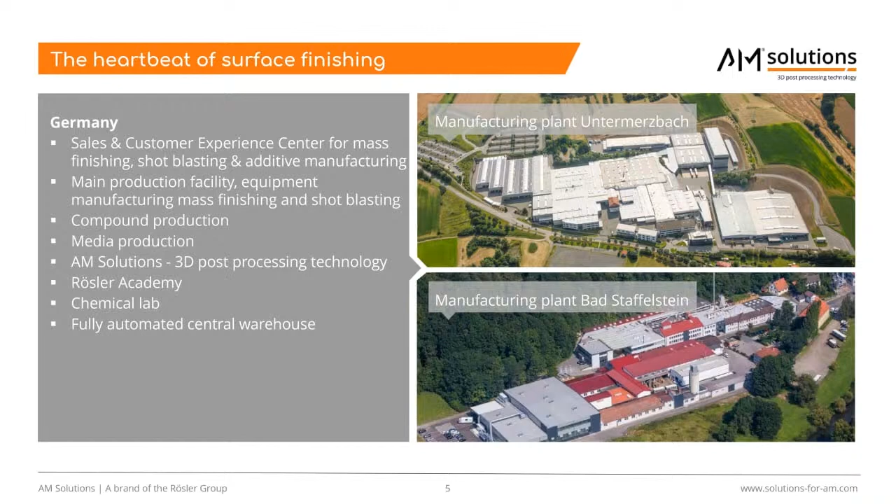So what you saw on the video are the three pillars of the Rösler Group: mass finishing, shot blasting, and AM Solutions. What you can see here on the slides is our headquarters in Germany, one in Untermerzbach, one in Bad Staffelstein. Both are in the north of Bavaria, in the region called Franconia.

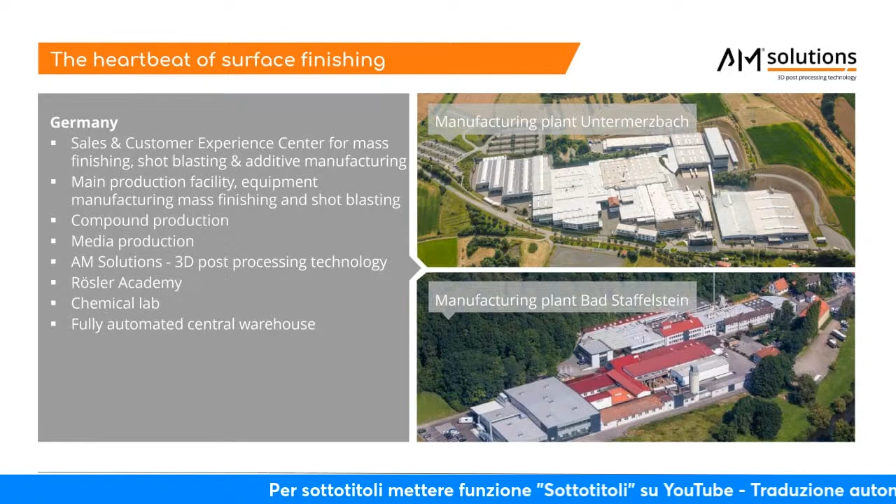In these facilities, we really build up our machines from a steel plate to the finished machine, including all the engineering - software engineering, mechanical engineering, electrical engineering, manufacturing, welding, and so on, including the electrical cabinet. We also have media production and mass finishing there. And of course, we have the Rösler Academy, the AM Solutions, and a chemical lab, and so on.

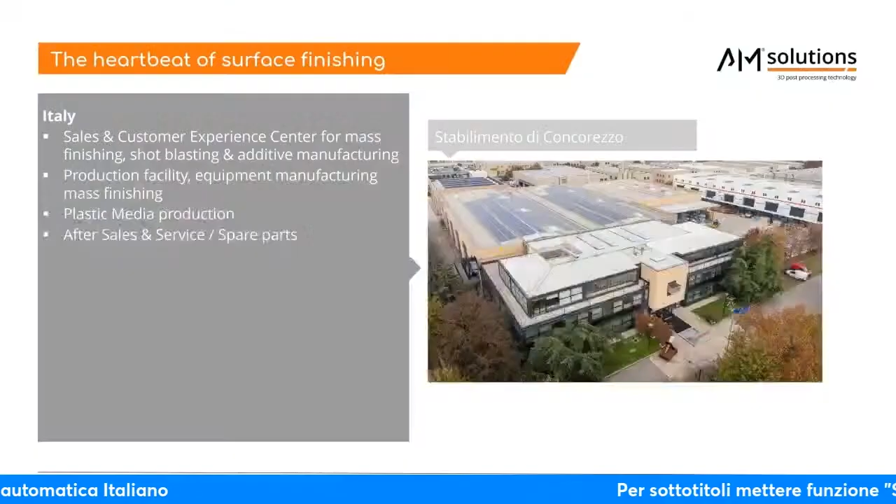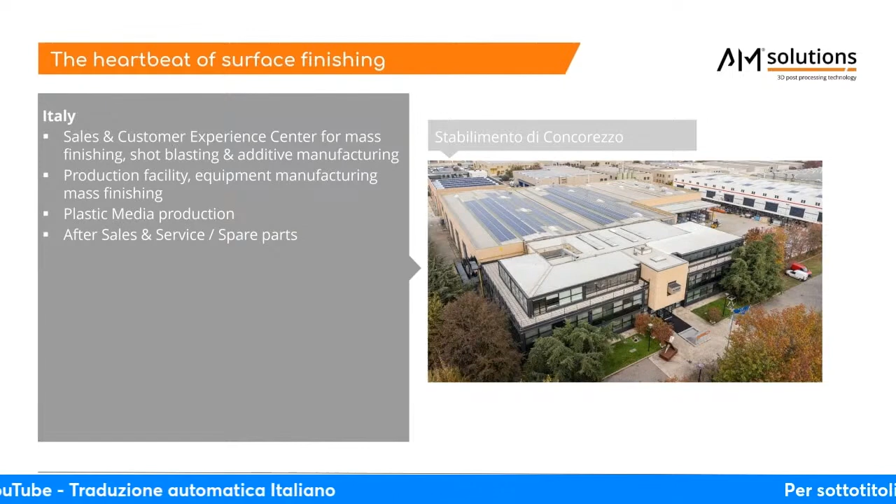I would like also to introduce to you our headquarters in Italy, in Concorezzo, close to Monza. Also with a sales team and a customer experience center for our customers. Production, service, and plastic media production are located there as well.

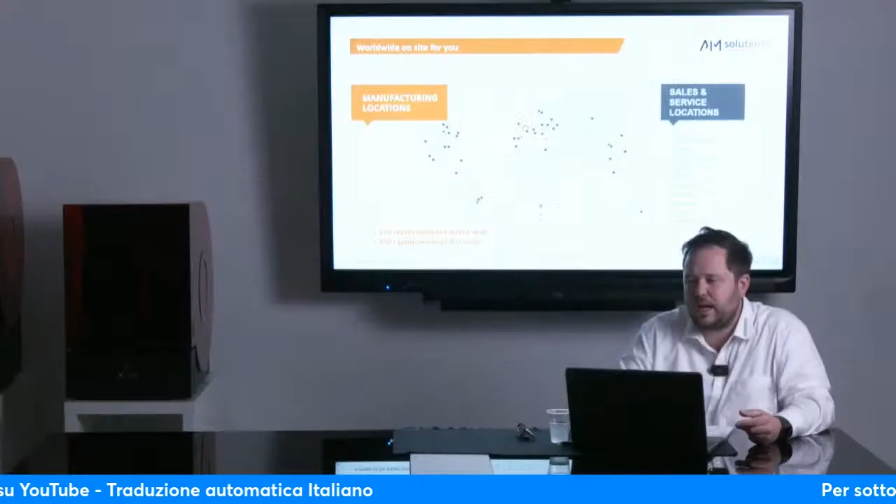And we are a global player. That means we can really service your machines and your processes across the world with our manufacturing locations, for example in Germany, France, Italy, and the US, but also several additional Rösler locations for sales and services, and 150 representatives worldwide.

Some facts and figures of the Rösler Group: we are close to 1,600 employees. We have more than 80 years experience in surface finishing. And, for example, we produce more than 50,000 different process media for mass finishing.

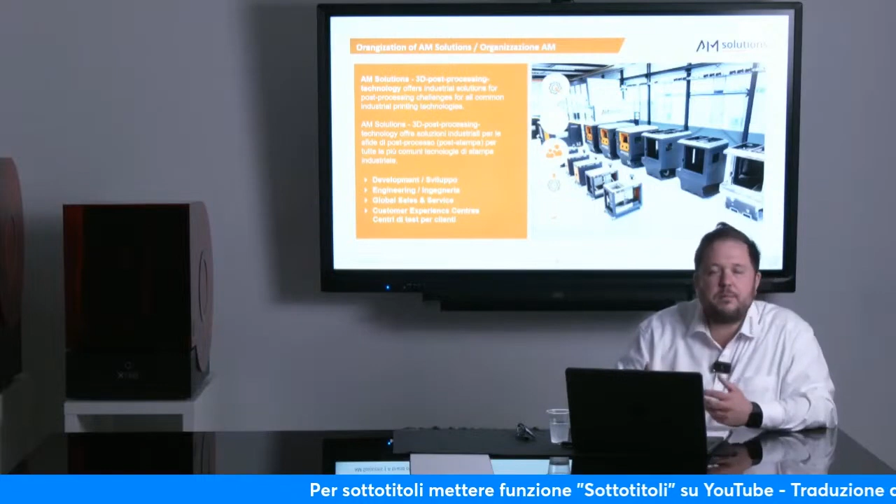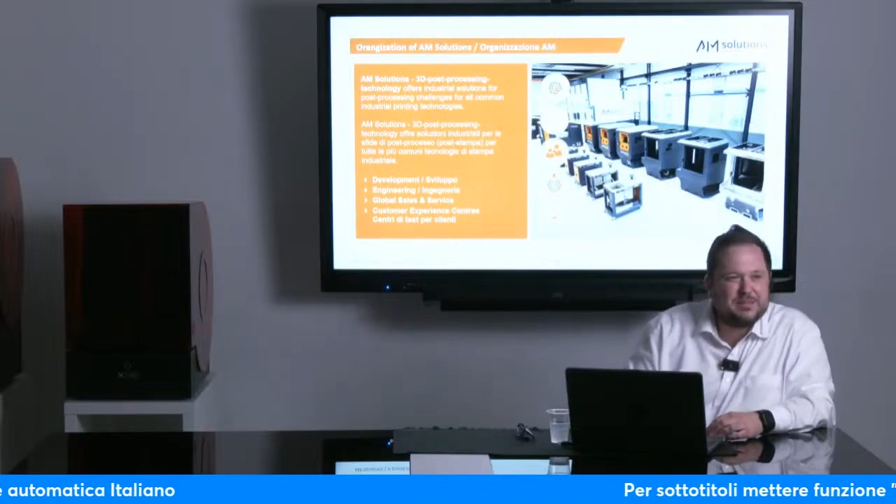Here's a short idea of the organization of AM Solutions. AM Solutions was founded in 2018 as a brand of the Rösler Group. Why? Because we figured out a lot of requests from this crazy 3D printing world, and we needed to found a small team which we give the space and also empower to act in this environment of 3D printing. That is why we have a team of developers, a team of engineers, and of course a global sales team to have really the right solutions for our customers.

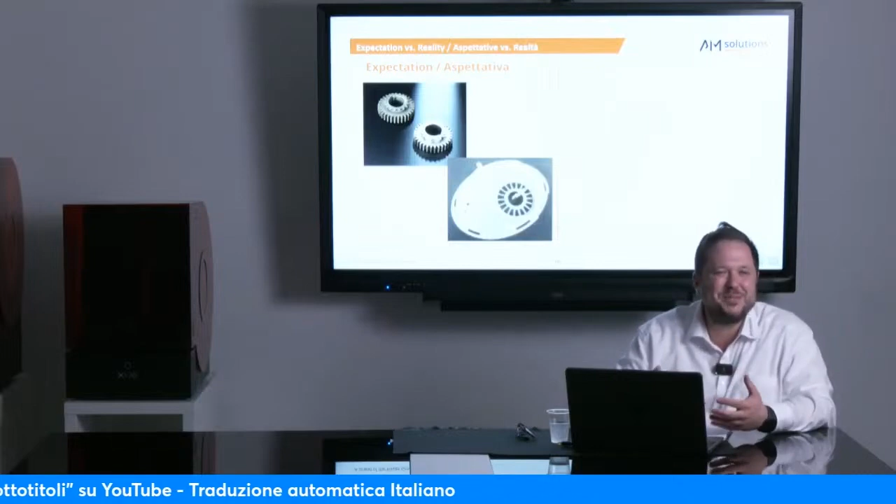But why AM Solutions? When we started in 2018, we also believed in miracles - we thought, okay, you have a 3D file, push the button on print like on a desktop printer, and you receive the finished part. But the reality was different.

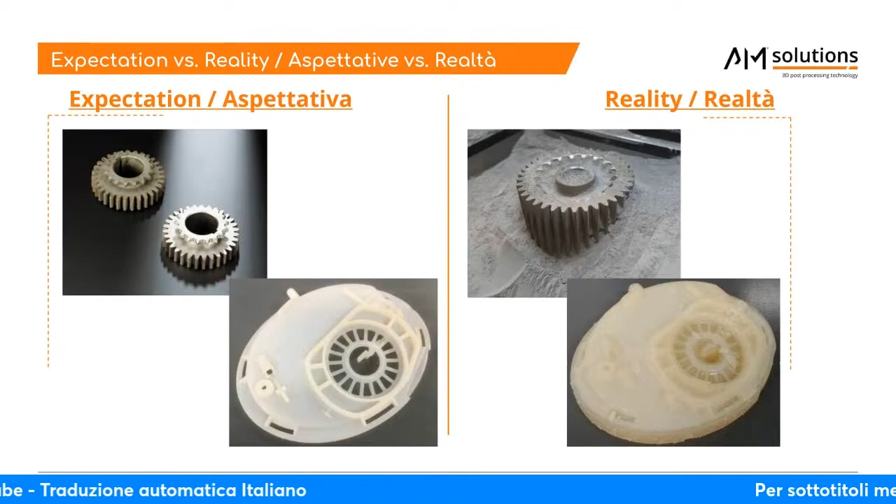And so alongside that, we also saw in the Wohlers report of 2019 that a quarter of the overall costs per piece are dedicated to post-processing. Well, meanwhile, I think it's a third of the costs.

Our philosophy, our vision, is to have an automatic solution. It could be with a robot, but could be also smart engineered machines.

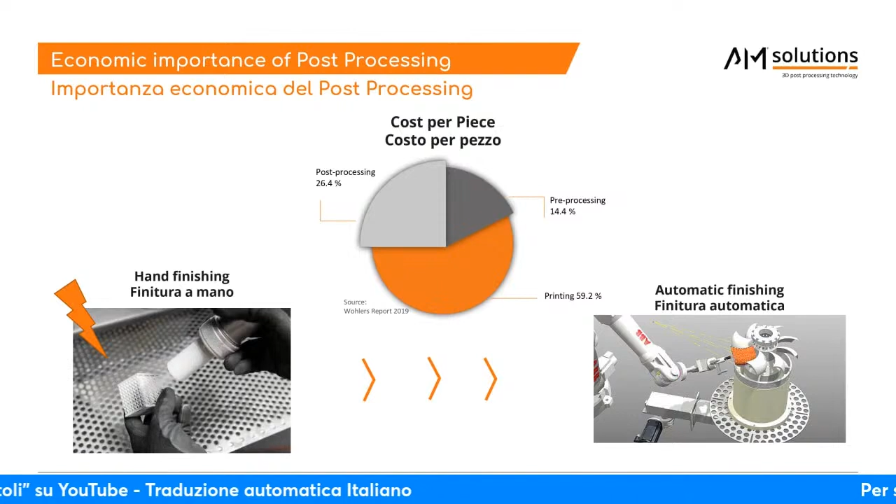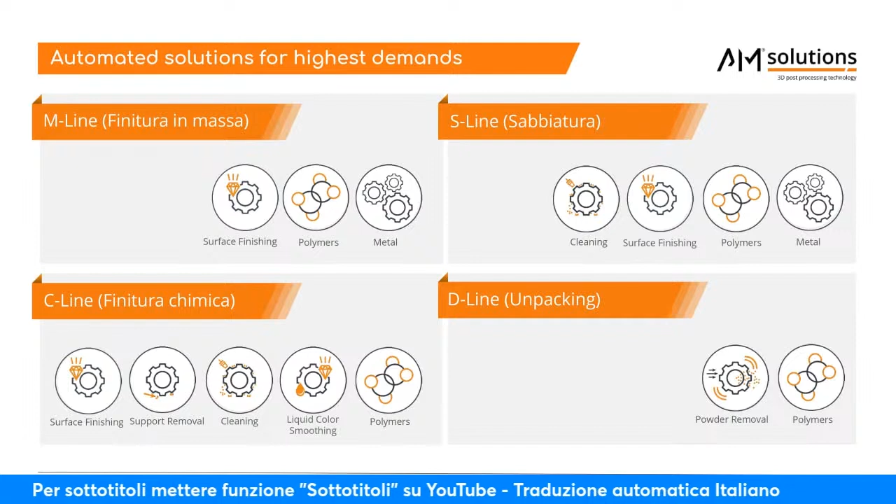We have, alongside all necessary industrial printing solutions, post-processing solutions available. We have mainly 4 different types: the M line for mass finishing, the S line for shot blasting, the C line for chemical, and the D line for unpacking.

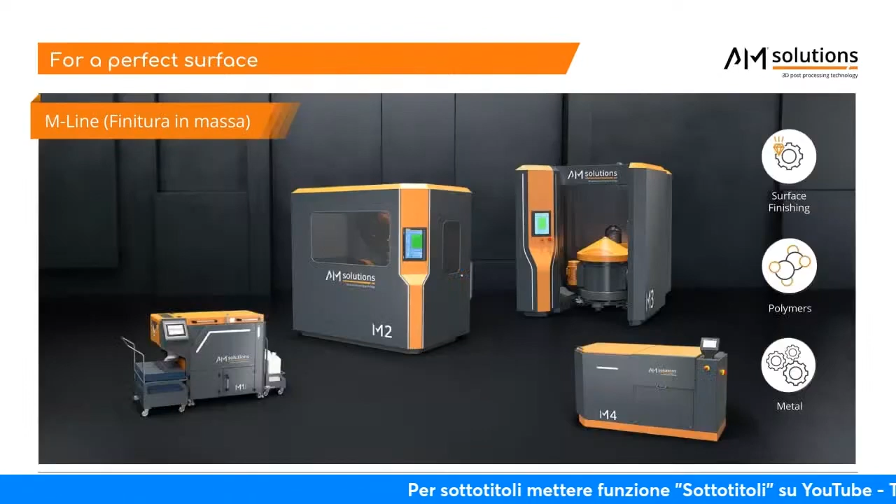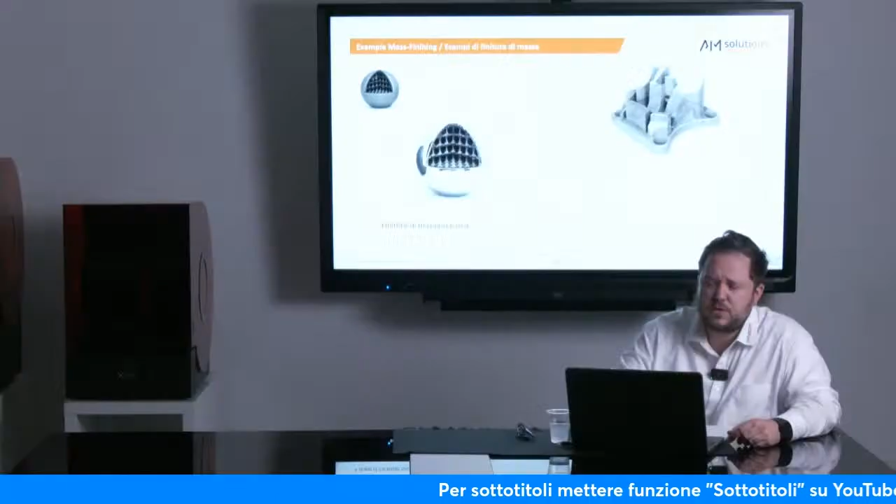To give you a brief overview of the M line, here are some examples of our machines. But more interesting is the parts we can work on. For SLM parts, which are usually quite rough, the RA value starts at 9, goes up to 14, 15, even more. We can reduce the roughness with mass finishing down to an RA value less than 0.something, for example for medical implants. What's also super interesting is that we are able to treat inner channels too. This is a development mainly made in Italy by our colleagues in Concorezzo.

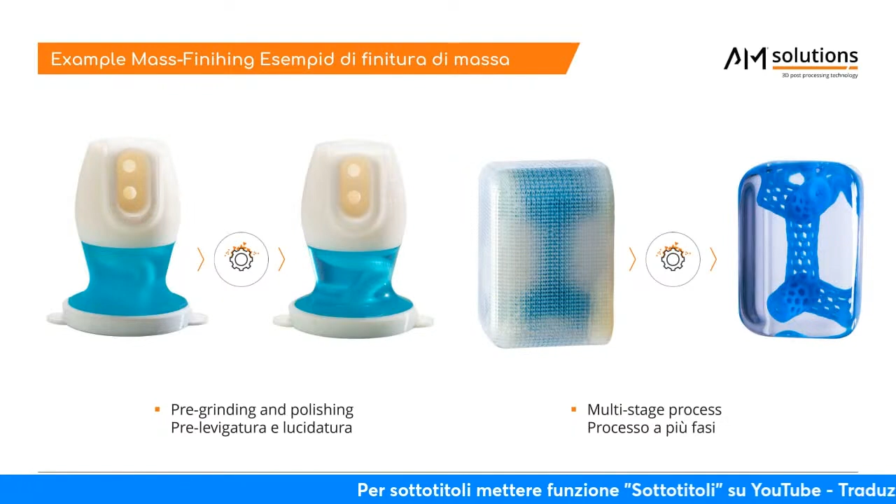We are also able in mass finishing to treat SLA parts, like the world's first USB stethoscope you can see here, which is 3D printed. It's one of our customers. We make a pre-grinding and a polishing, and we also have the part with us in the exhibition outside. That means we can make polyjet parts really glass clear.

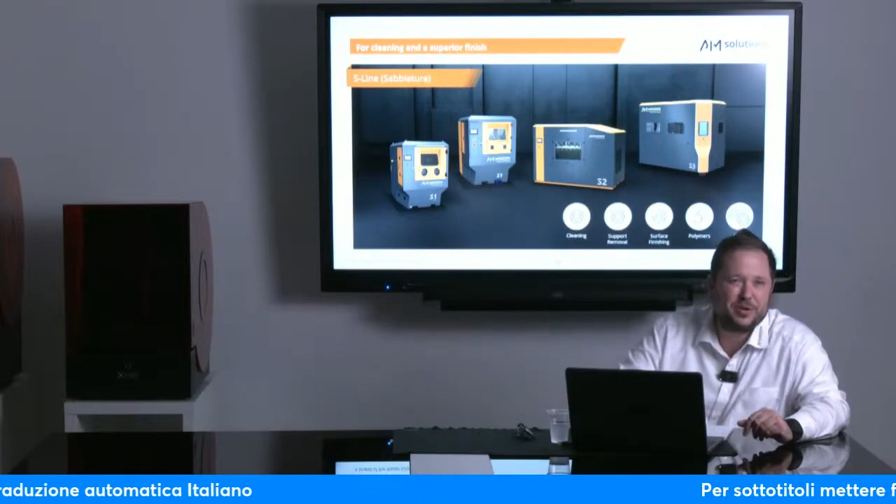Short overview about the S line. Feel free to ask us. Treddy is one of our lovely partners, with the S2 and the S1. I'll give you one example for shot blasting: wet sanding, meaning wet blasting, which is also super interesting for metal parts. You can have an abrasive wet blasting process as step 1, and on top of that you can add an additional second polishing step.

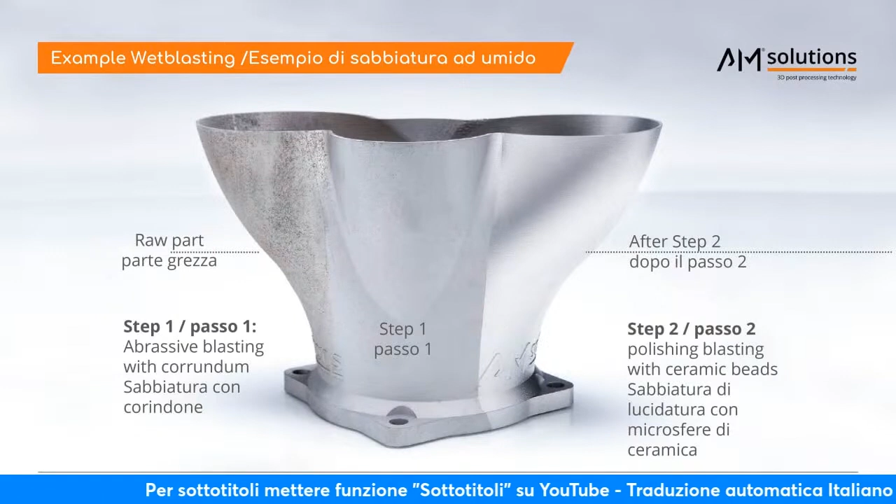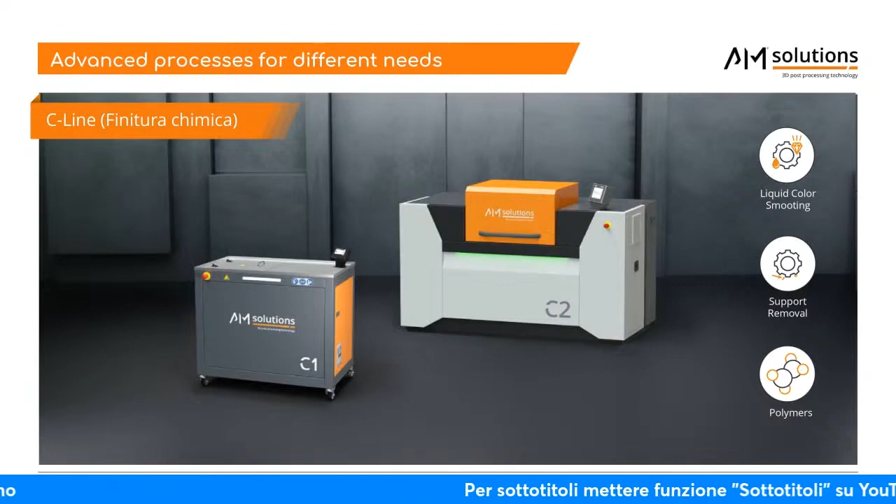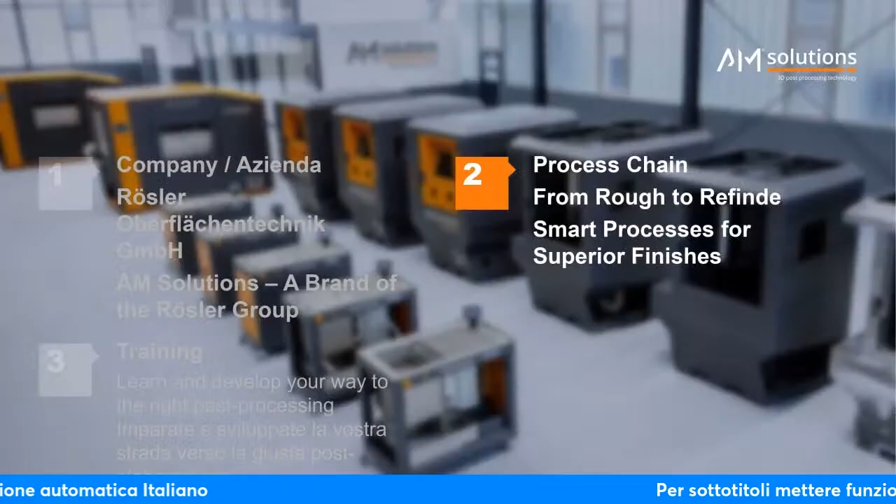Now let's come to the core: the smart processes for superior finish. I'll pick an example from the usual process chain, and we will shape today the process chain the way we do it with our 2-in-1 approach. I'll give you some examples of why your blasting media is so important to shape your surface.

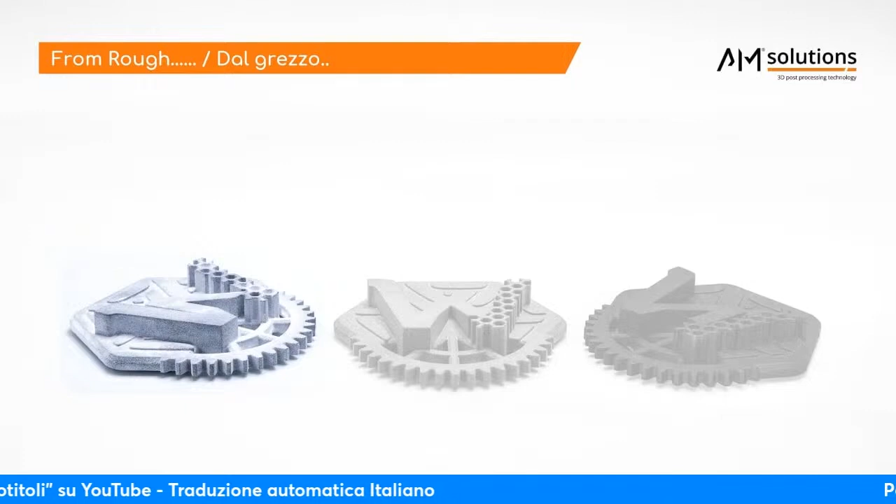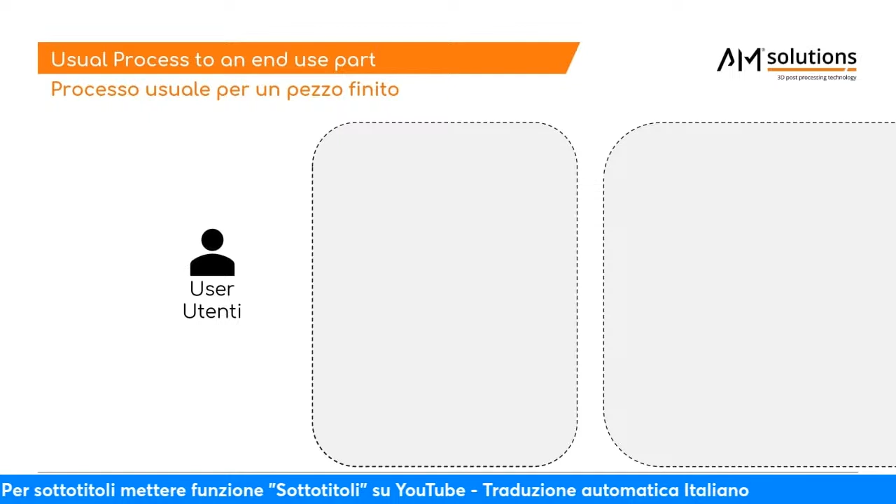For example, from rough - you know MJF parts, after unpacking you have the potato state - to a clean part, which then often gets colored by dyeing, and you would like to have a dyed part. So now you're the user thinking, okay, what are my post-processing steps?

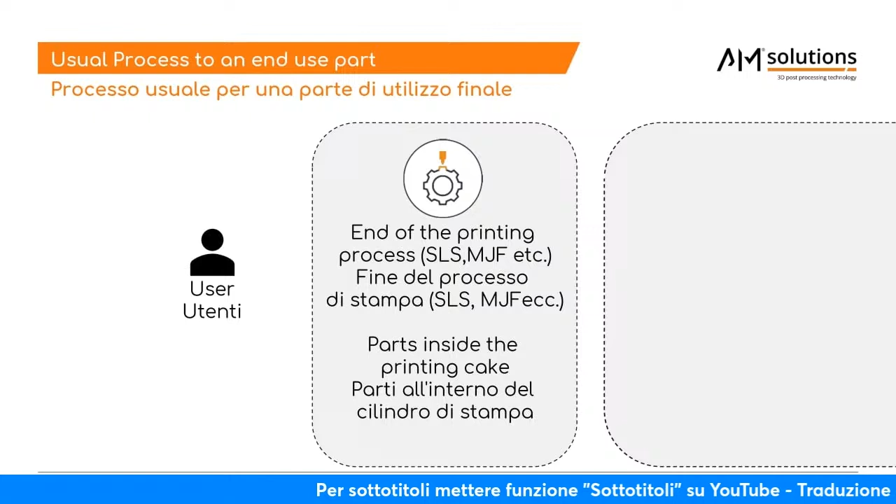First of all, we start post-processing in our philosophy at the end of printing. That means you have the full cake with parts and loose powder. So the first step is unpacking, of course. Unpacking is often a manual-driven process - you dig the parts out of the powder cake. That's why, for example, AM Solutions and HP together made a joint development in an automatic unpacking station, which is available at HP.

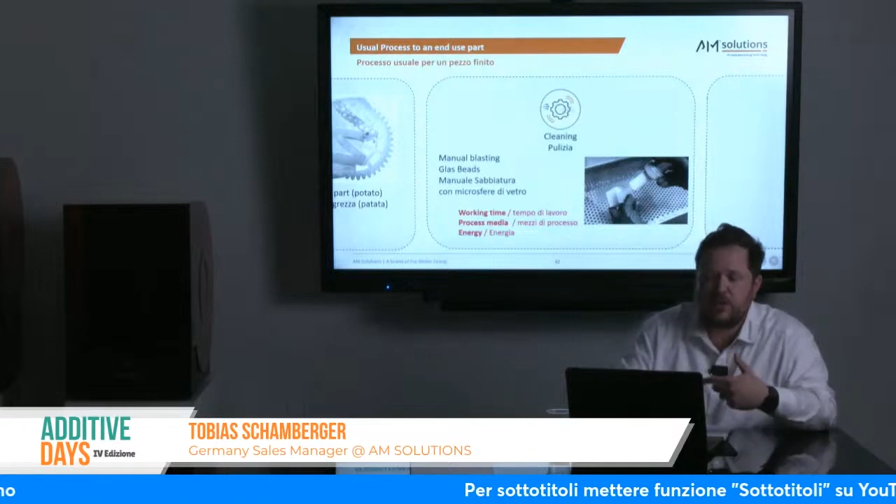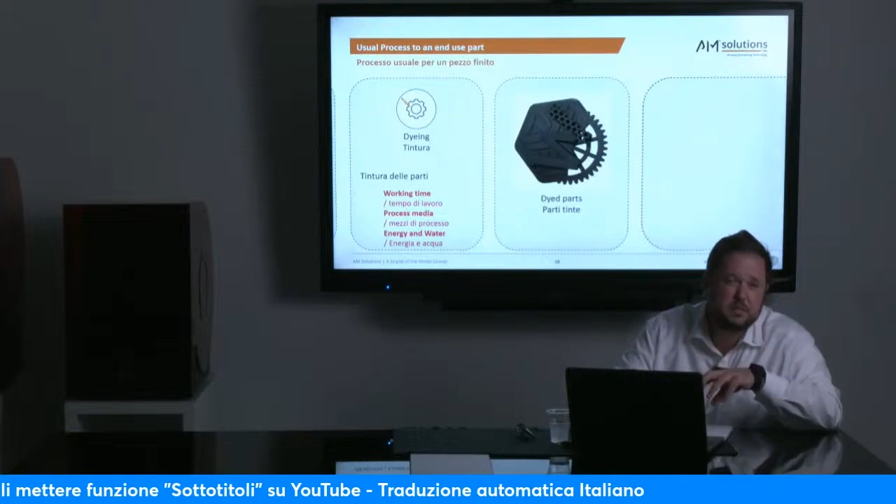Then, of course, you have the raw parts, the potato stage. From the potato stage, you want to receive a dyed part, so you have a cleaning process usually done with a glass bead. Then you have the clean parts, and afterwards you do the dyeing. Everything involves working time, process media, energy, water, as well for the dyeing, and then you have the dyed parts. But in this process, you don't have the final appearance of a dyed part because it's not semi-glossy when you dye it directly after glass bead finishing.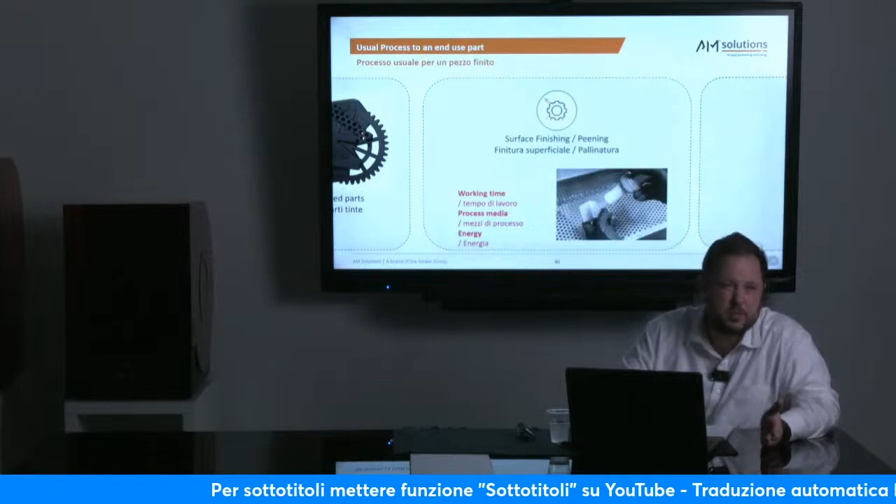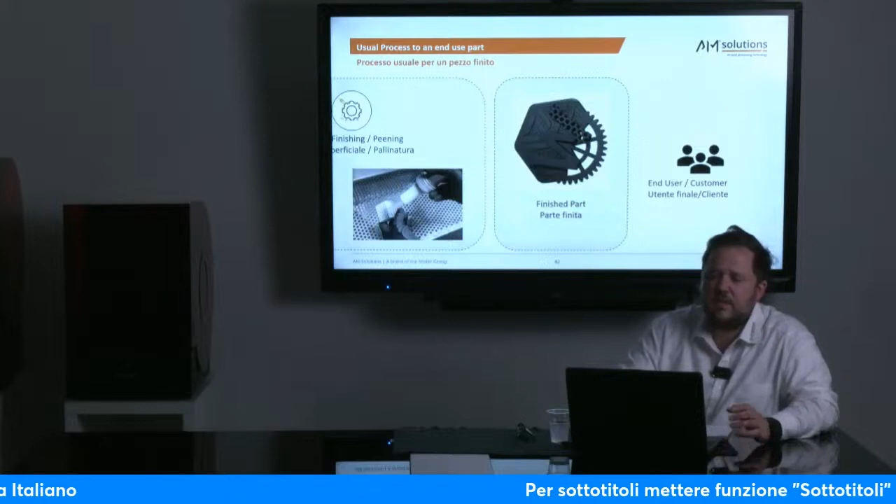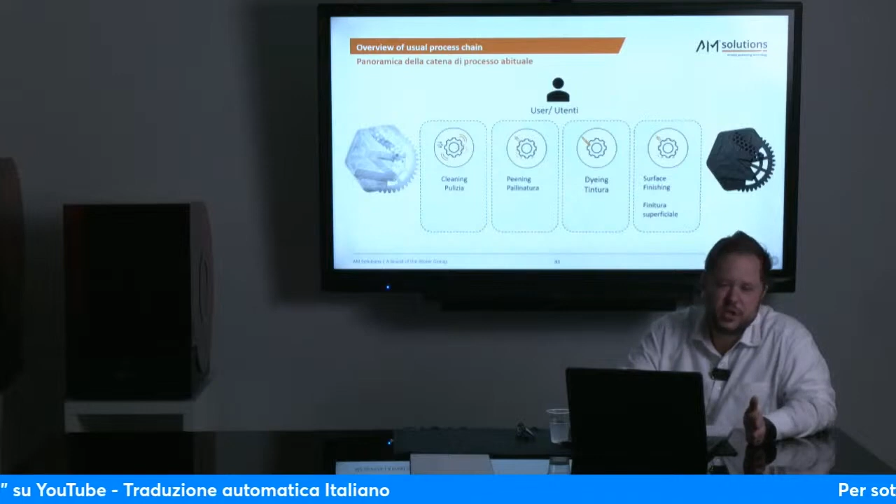So that means you need to add an additional shot peening process on the already dyed parts to receive a more semi-glossy surface. Once again: working time, energy consumption, and process media. And then finally you receive your finished part - what was the expectation, not of the user, but of the customer, of course. So quite a long process chain with a lot of steps.

The usual step is also, for some parts, cleaning with a glass bead, shot peening with a polymer blasting media, then going to dyeing, and for some parts you have post-shot peening after the dyeing - for example luxury stuff like glasses, which usually need to be blasted after the dyeing process.

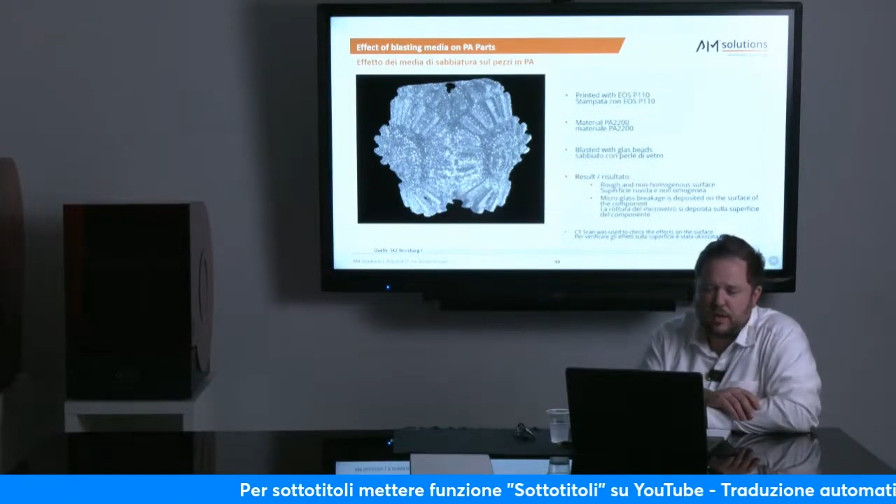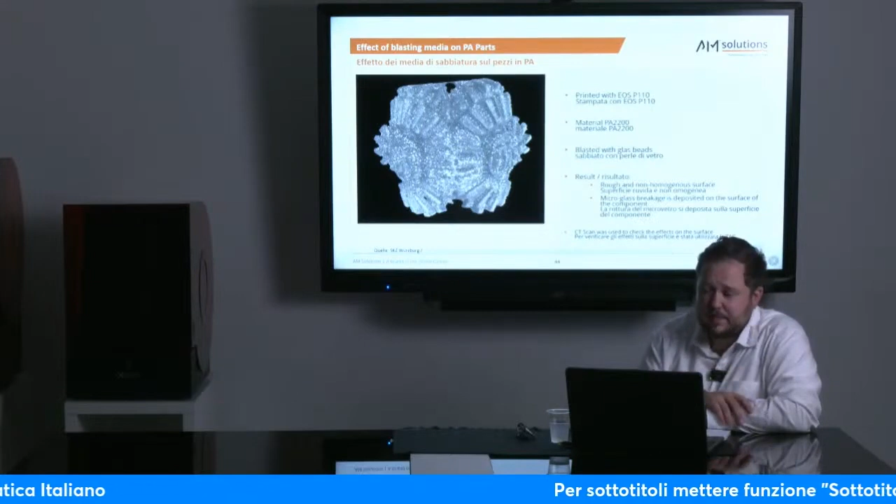So this is the idea of how a part looks when you blast it with glass bead. This part here is the brain gear from the SKZ - a German plastic research institute - and they use our machine, but they helped us as well. This one was not blasted in our machine, but in a common shot blasting machine by hand with glass beads. The picture is a CT scan, and you can really see all these small sparks are broken glass embedded in your surface.

That means after such a process, of course, you will have a super rough surface and a non-homogeneous surface, due to the fact that it's hand blasted, and you also have this broken glass inside.

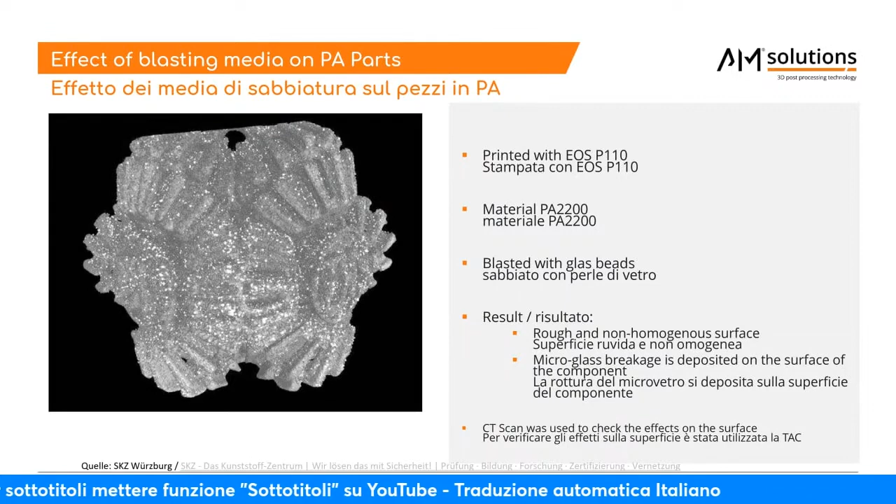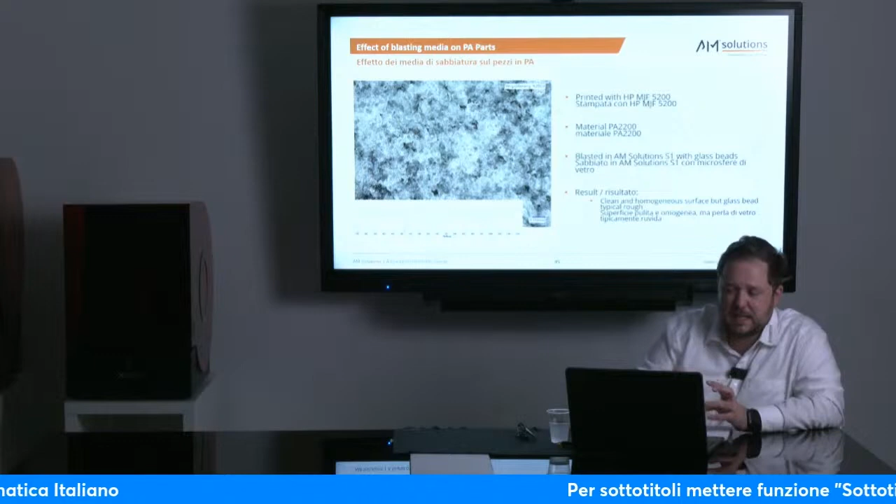Let's have a look at the surface with a zoom of 200 times, when we blast an MJF part made out of PA12 in our S1. You can see on the surface that it's more homogeneous than blasting by hand, and of course you still have a typical roughness from the glass bead. You can see it here - the RA value is approximately 4.5, 5 micron, depending.

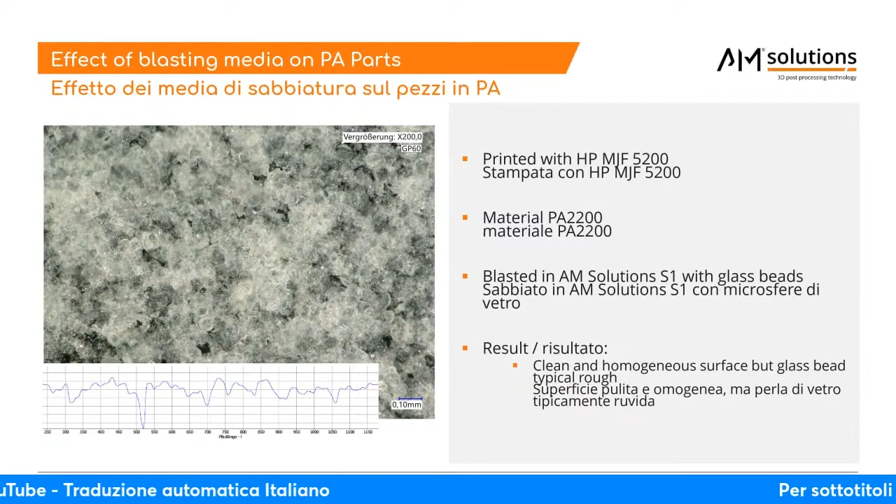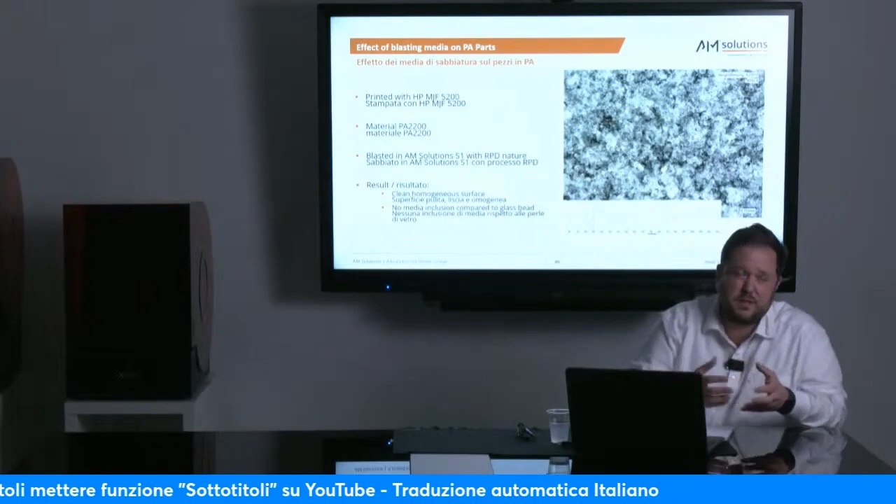But there is still broken glass on the surface. Our media circuit is different, so we reduce it a lot to have not so much broken media inside the blasting media circuit, but it's still possible. What we use when customers would like a rough surface, because a rough surface is sometimes necessary. For example, if you go with such a part to mass finishing, it makes sense to keep it rough, because then the grinding is even better than on a shot peened part. Instead of glass bead, we usually use our RPD nature media.

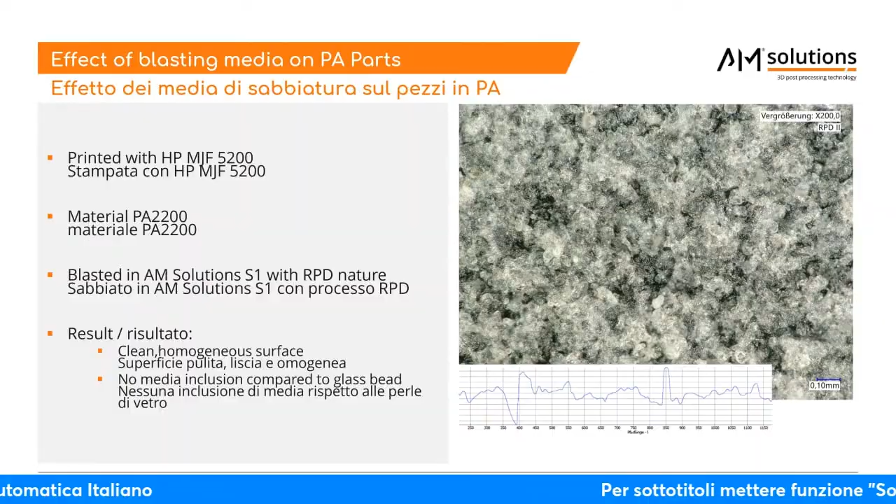What is polyamide media? The main benefits are that the surface is super clean, super homogeneous, and especially you have no material inclusion, because broken glass with skin contact can create some skin irritation.

Now let's look at the same part from the SKZ, also printed on the same EOS printer, also PA12, processed in our S1 with our 2-in-1 approach, which is our polybead process with RPB media. You can easily see on the pictures behind me the one with the glass bead - you can see the glass everywhere, a non-homogeneous surface. And here you can see a super smooth surface, well prepared, with no broken media inside it.

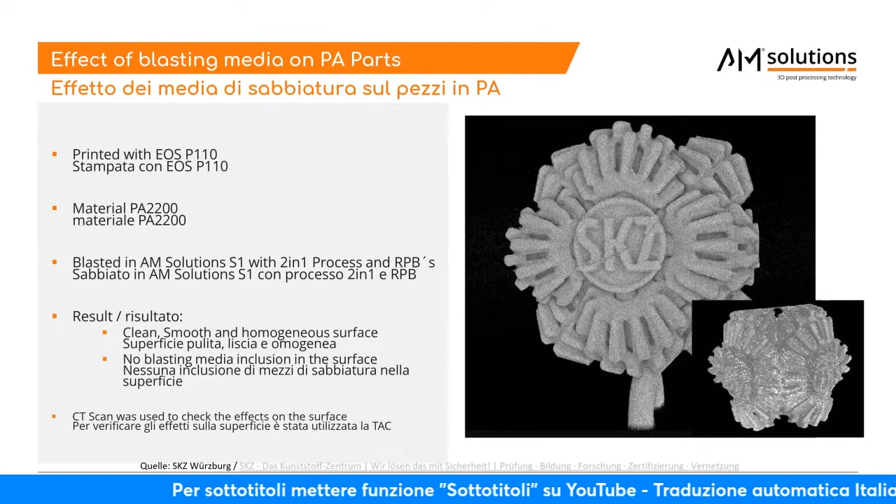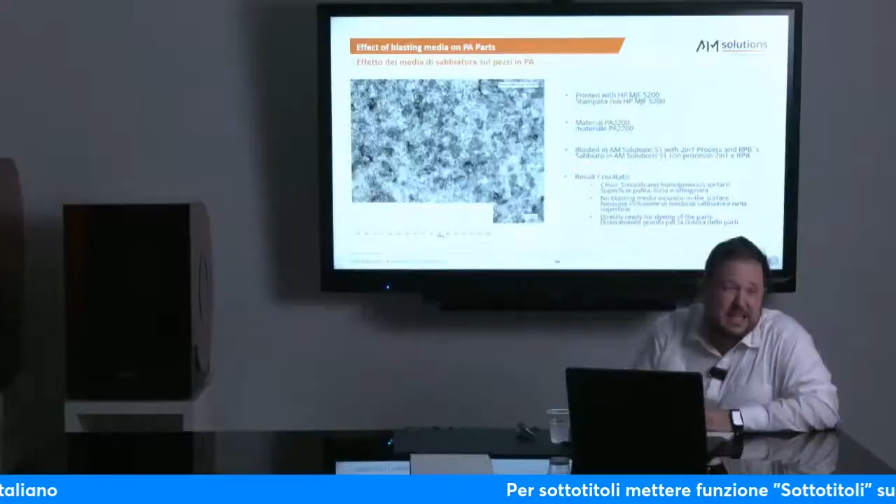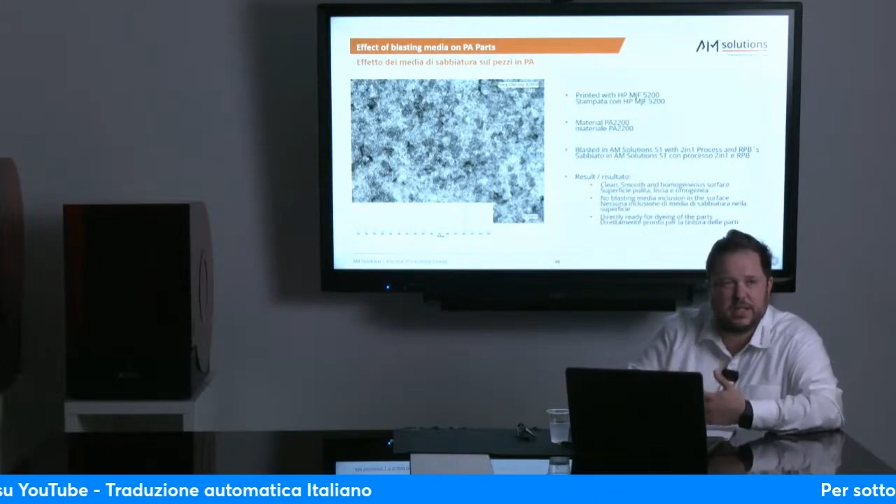Also with these two CT scan pictures, have a closer look at the MJF part. The roughness value is totally different compared to glass, for example. We're speaking about RA values of about 2 microns. So usually, even when you don't dye the parts, you have a totally different quality of surface than using the glass bead.

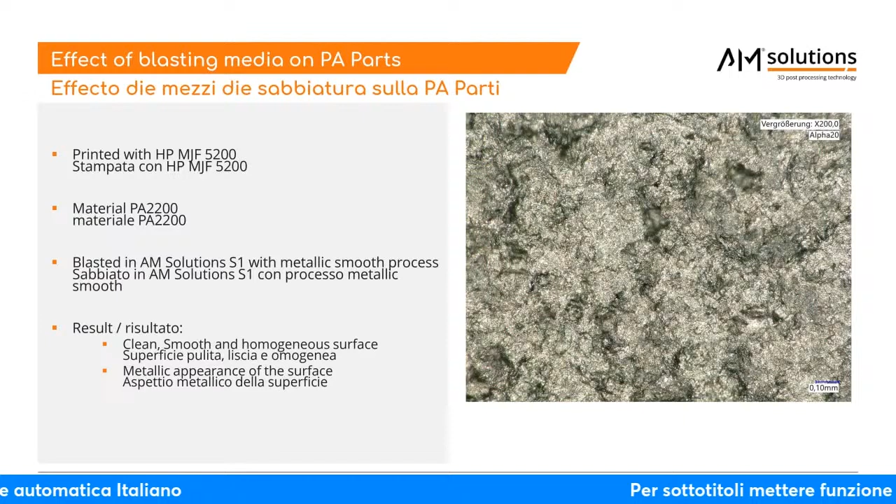One quite brand new process we have, we call the metallic smooth. We have a part with us here, you can have a look on the outside. This is a process where we receive a super smooth and clean surface, and the main thing is the part itself will receive a metallic appearance - it means the part looks more metallic.

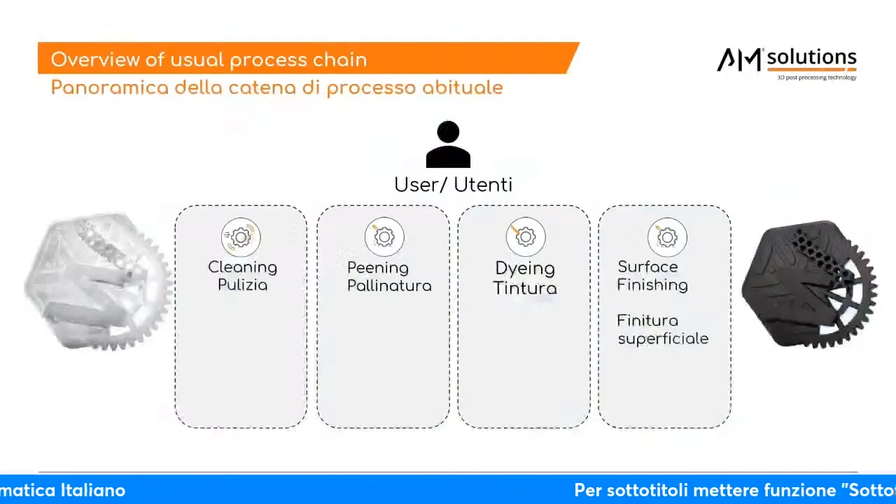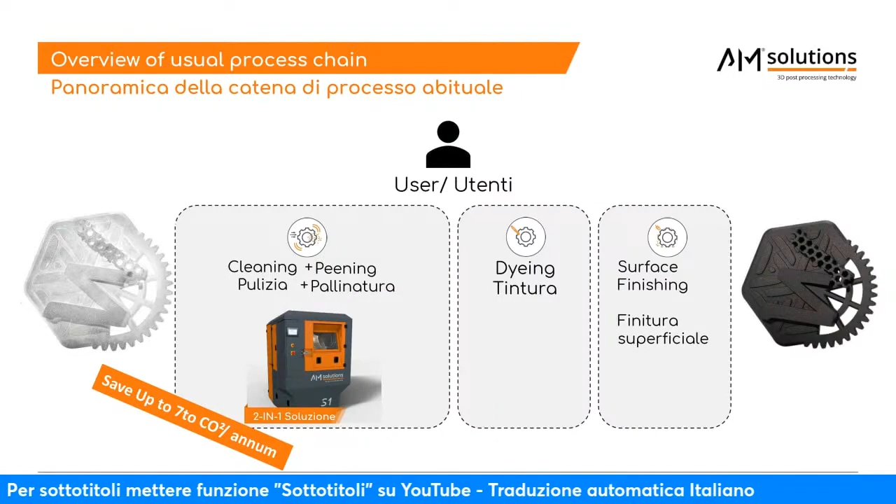Now let's shorten the process chain, because what happens if we can combine the cleaning and the shot peening in front of the dyeing? We were able to do that, I already spoiled that with our 2-in-1 approach. This finally ends up with our customers using one machine with one process instead of 2 machines and 2 processes, saving money and as well 7 tons of CO2 per year.

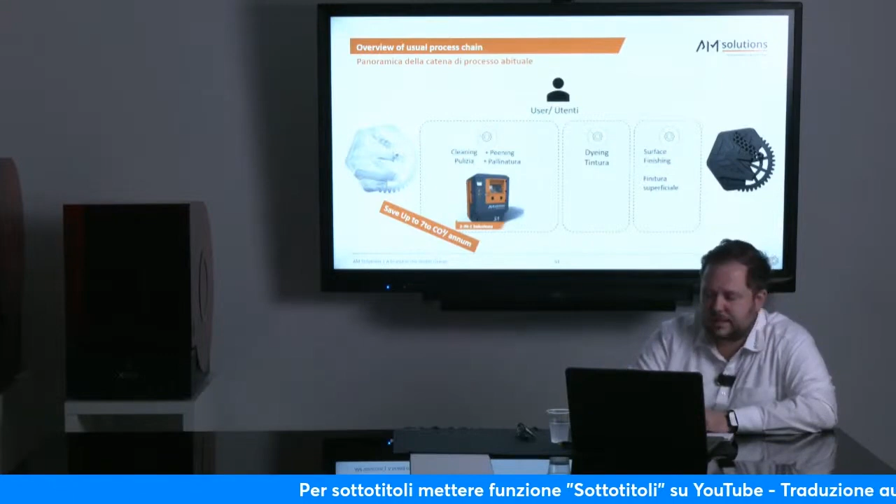Sometimes, as I already told you, for luxury parts it may be necessary additionally to shot peen the parts after the dyeing. So, a lot of information - just to give you a brief overview, inside is our machine and the main targets: cleaning, surface finishing, homogenization of the surface.

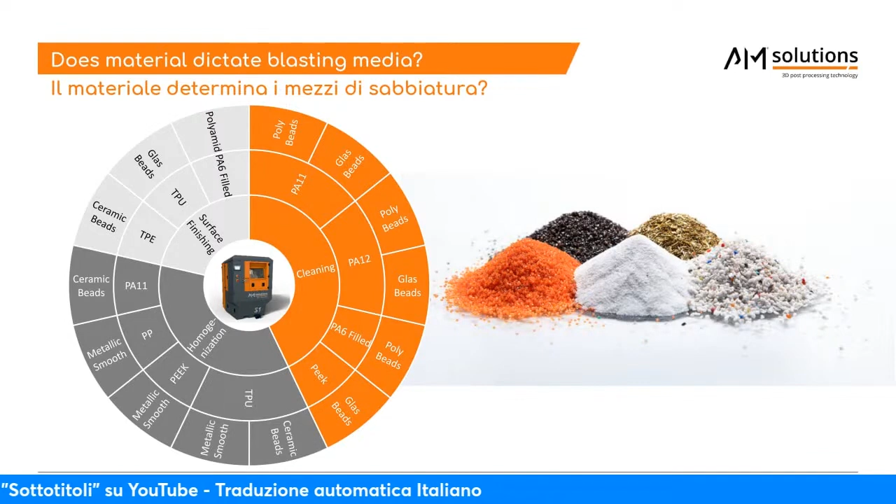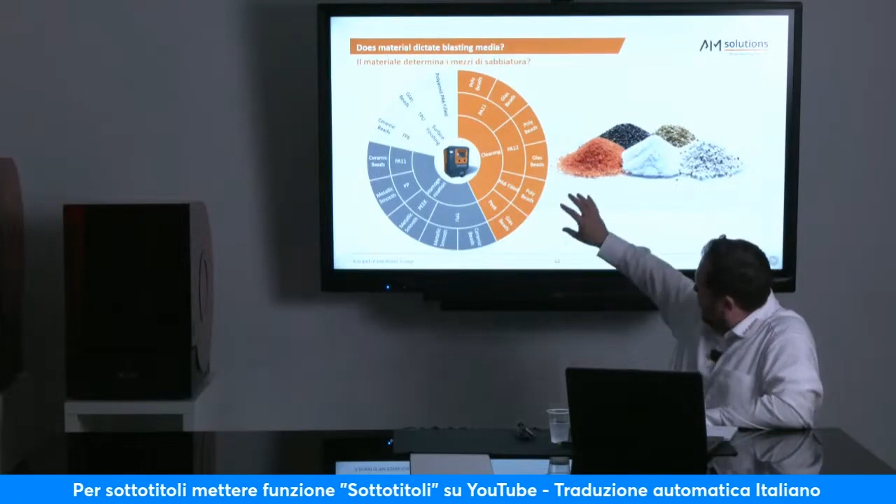On the outside, there are a lot of materials already available in polymer powder bed - PA12, of course PEEK, TPU, PP, PA11, and so on. On the outside, we also need to choose the right media for the right material to receive the right quality. You will never treat a TPU part usually with a glass bead, for example - you need more impact on the surface. So really, even when the shot blasting process seems so easy, you have also the possibility of several medias.

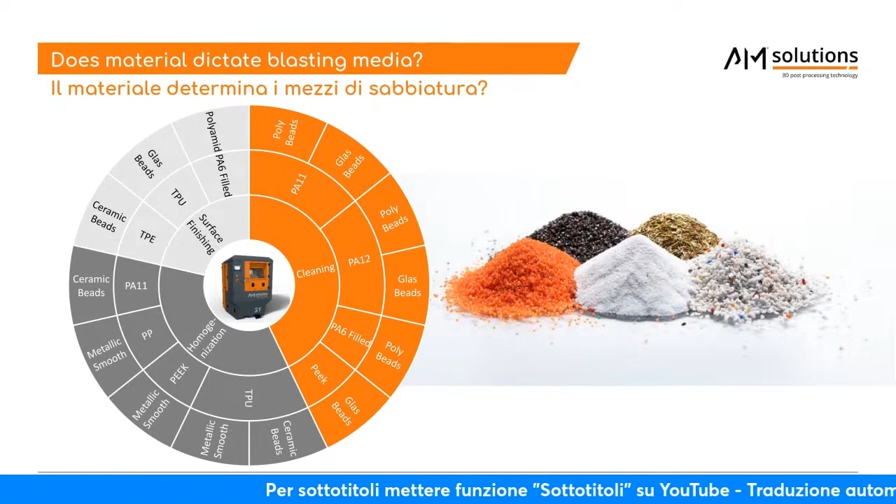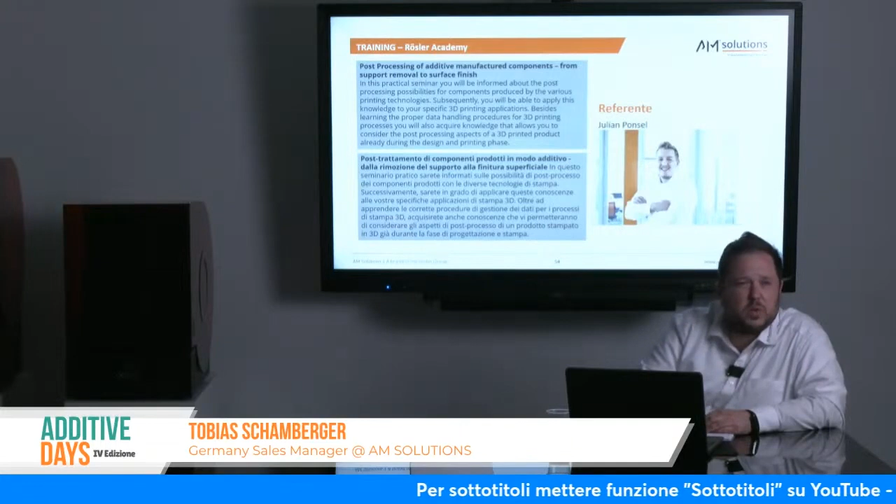Finally, let me introduce our training from the Rösler Academy. Because of the high requests from different customers with different challenges - we call them challenges, not problems - we decided to have an academy training with a certified trainer. This is one of my colleagues, Julian Ponsel, and you can learn within 2 days, more or less in a workshop, what state-of-the-art post-processing means, and we really work on your problems during the training.

I think Julian would be quite happy to have one training in Italy, so maybe we can find a group of local people here. If you're interested, please contact Ricardo and the team from Italy.

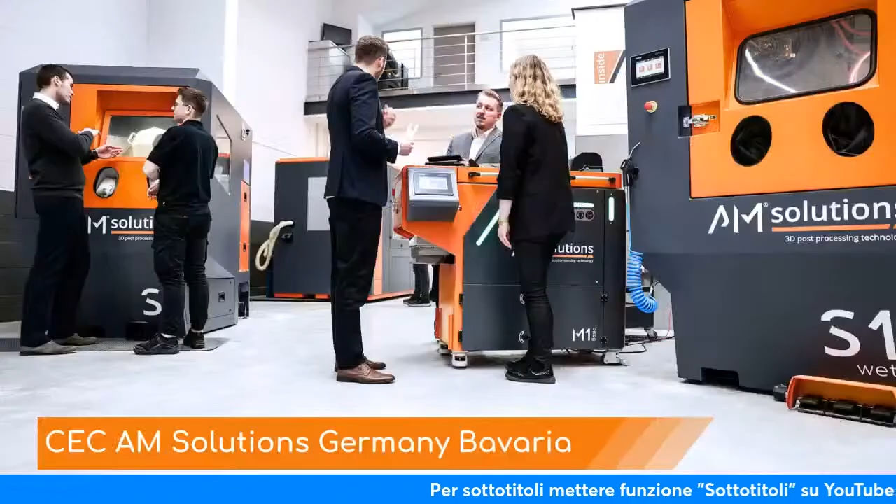Here's one picture of our CEC, where usually the training happens, and where our customers can have a look at the process. That means you can bring your parts, finish them inside our facility, and see our capabilities overall. As I said, 7 tons of CO2 saved in only one process.

We have more 2-in-1 approaches available at AM Solutions because of one planet, one focus. Environmental responsibility is a care of all of us. So I'm finally done - grazie mille again, and I'm open for your questions.